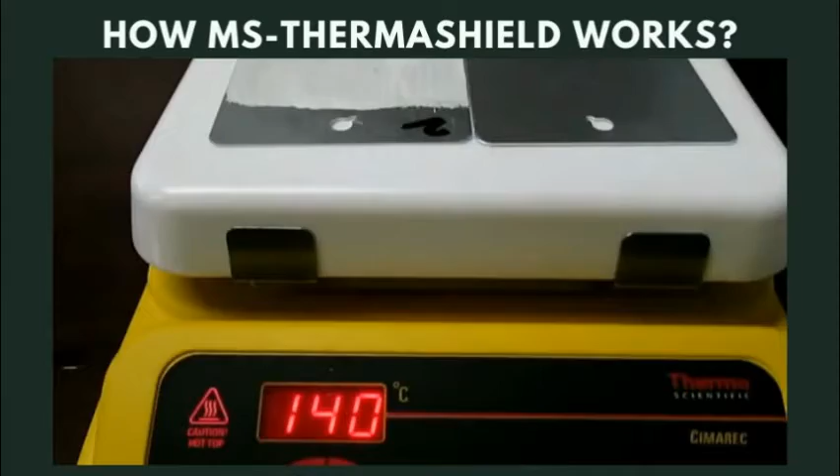I'm going to pull back again. See, it's 140 degrees, both of them on the same plate, and that's what MS Thermashield does.

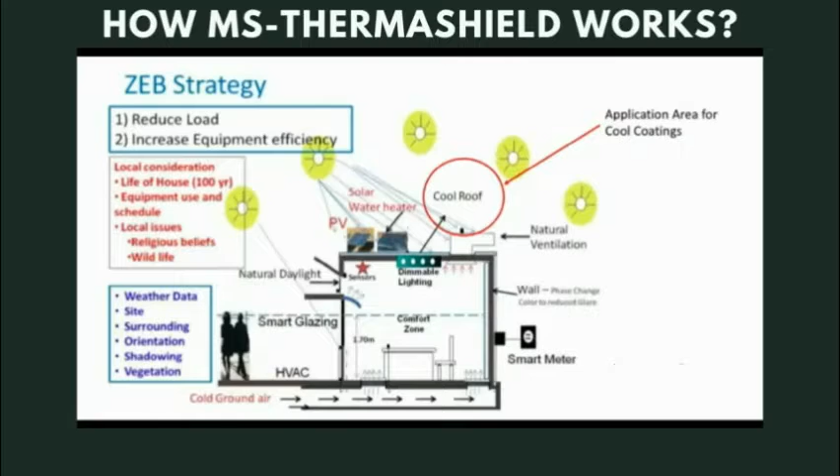This is known as cool paints, and in technical terms it is basically reflective paint which reflects the energy of the sun. Cool surfaces don't come only in paints. You can do cool tiles, you can do other cool surfaces by different methods. But this is one of the cheapest ways of really transforming something for low-income houses so that we can actually provide thermal comfort for people very quickly.

By this reflective paint, what we do is we actually control the sun's energy, and we reduce it by the amount of reflection that paint can do. So what is happening is, this is about 80% reflective paint. That means it reflects 80% of the sun's energy back to space. Only 20% of the energy hits the surface.

Now, because the emissivity, which is the property of the surface, is 0.9, that means 90% of the energy that hits this surface goes back to the outside air. Only the remainder of that goes into the house. So you can see that the majority of the energy is actually getting rejected or is going out to the air. And therefore, the inside of the house is much cooler, even though there's a lot of heat outside.